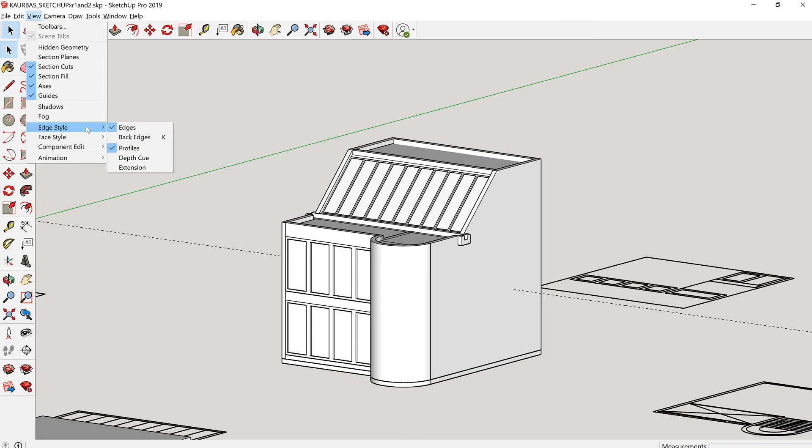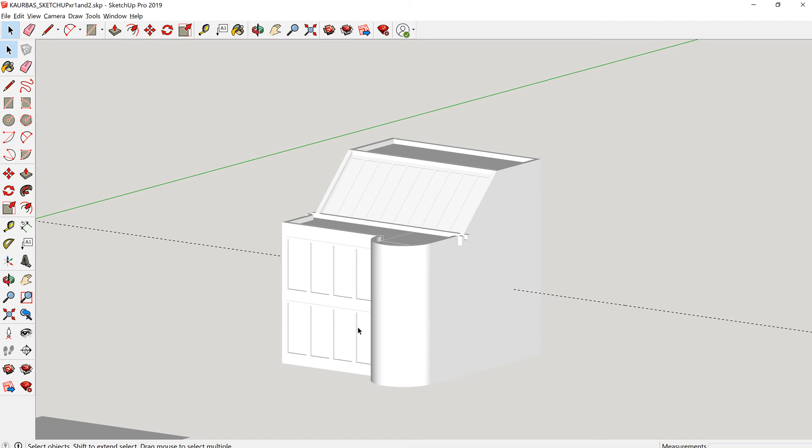There are different visual styles for showing your model. Go under the View tab to see ways of presenting your model by hovering over Edge Style. You can uncheck edges so it doesn't look like you have hard edges, especially for curves, or uncheck Profiles so you only see the faces without those lines.

Of course you do want to see the edges and the profile, so you can leave edges and profiles checked.

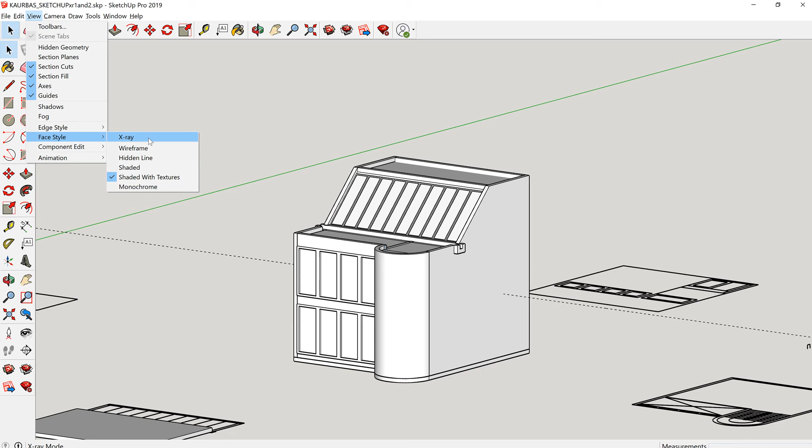Now under View you also have face styles. Here you can find X-ray view, so you can see through the surfaces of the wall. You can also uncheck that and go to wireframe.

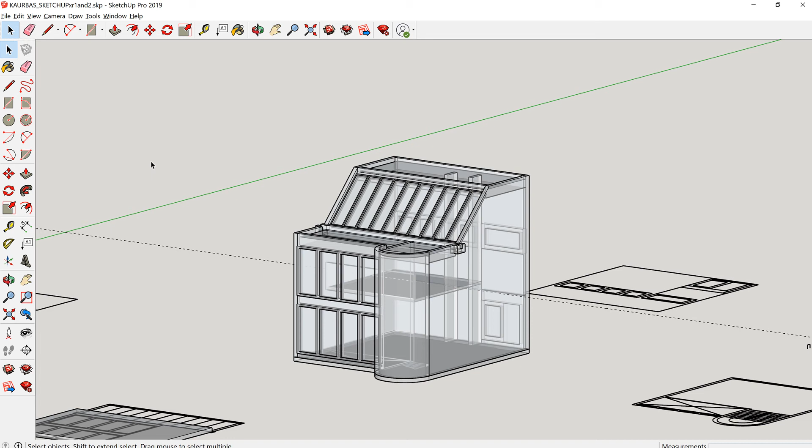Face styles also allow you to see just the hidden lines, or go to a shaded view. Of course, you can play around with all these different options.

Shaded with textures is normally what you want, especially if you have materials or textures applied to your walls. Monochrome, since this is already a monochromatic application, doesn't show anything, but if you have materials, monochrome will show this in one tone of color.

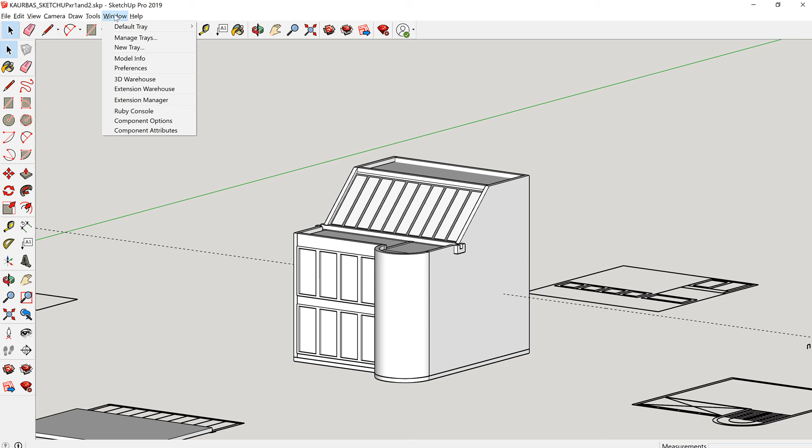There's also another way of changing styles, using default styles. Go to the default tray and make sure the tray is on, on the right side. Under Styles, if you don't see it, go to Window, Default Tray, and make sure Styles is checked, or any trays you need, so they will be shown.

Here we're in the default styles, which is where we are now. You can click on any of these styles and it will actually change the way we view our model. If you need to go back, simply go to the default style and click on the first box to go back to the default style.

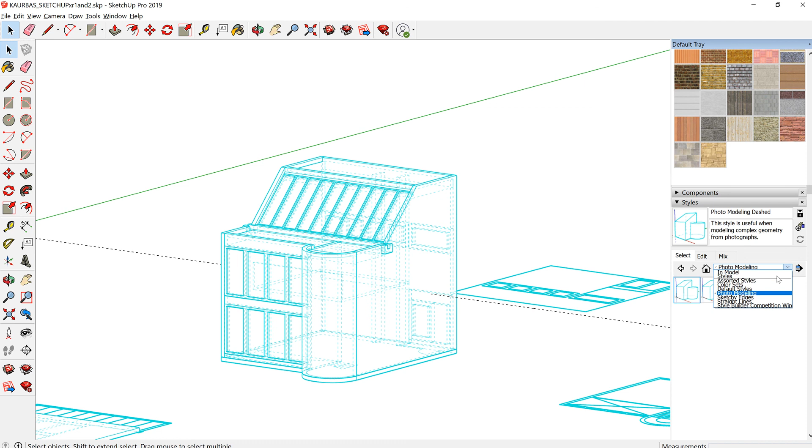If you click on the down arrow, there are other styles you can use, like photo modeling, or you can go to straight lines and see the differences.

Just experiment with all these different styles and see what works well for your scene or your model, especially if you like to make a presentation.

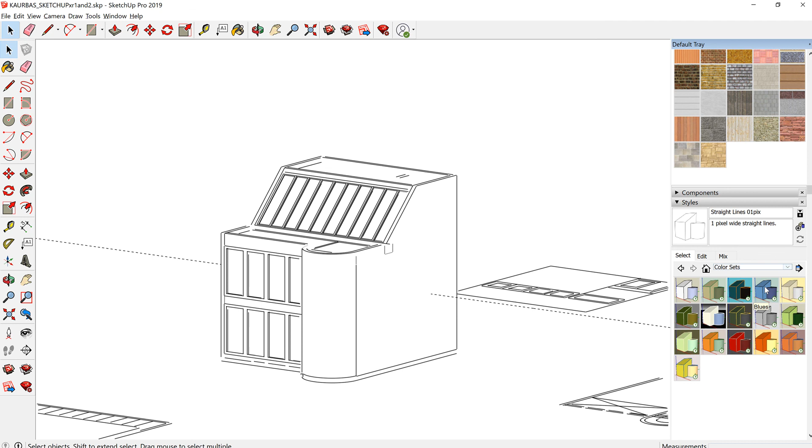You can also have other styles, like a color set style. Again, if you need to, you can always go back to the default style and double click on that first box.

You can also edit the style. If you go here, you can edit this particular style, like maybe uncheck edges. Notice that if you do that, there's an icon here like a recycling arrow going around, meaning that this particular style has been changed.

If you want, you can double click here to save that to the style. Again, if I bring back edges, that means this particular style has been changed, and you see that double arrow again going around. So to save the style, simply double click on it and the style is saved.

There are different boxes here as well to choose from, things you can use to edit. Just check on those boxes and make changes to this particular style.

So when you want to show a different way of viewing your model, simply check styles or go to View and change the appearance of the style, either the edges or the face of your model.